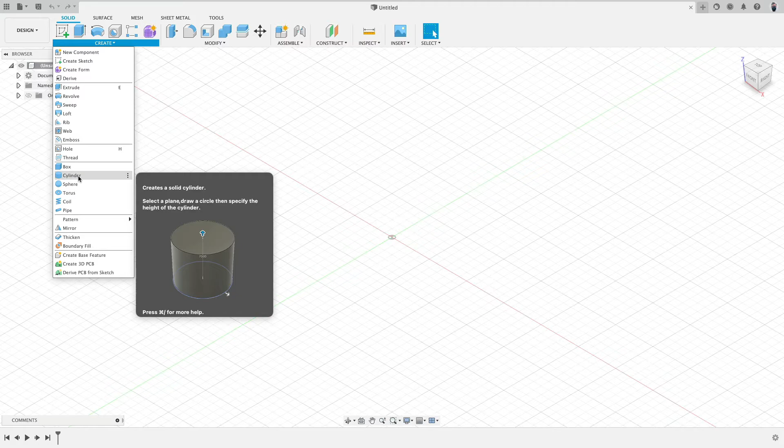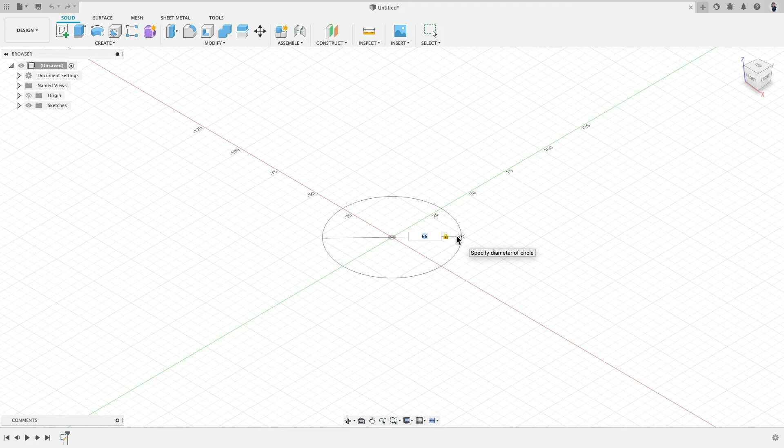So to start, we go to create and go to cylinder. When we create a cylinder, we can specify the plane. We want this to go vertically up. So I select the ground plane, click, and then go to the center point, click. And what I'm dragging out is actually the diameter. This should be 66, so I can type this in. So this is the diameter. Or if we know just the radius, which is half of it, 33 multiplied by 2. Pretty cool. The height is 160, and enter.

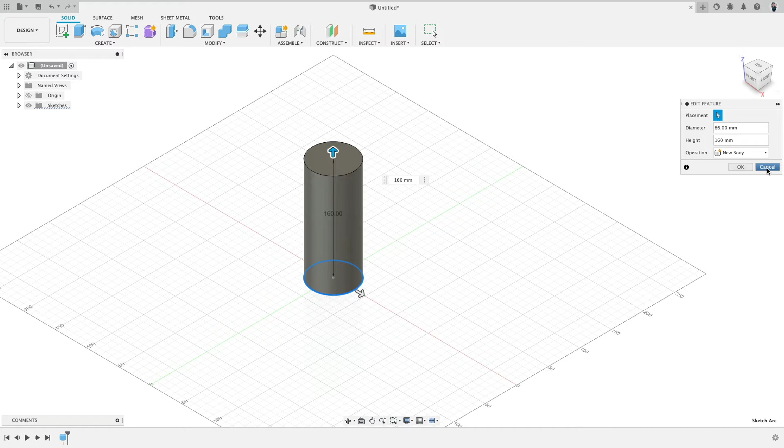And then you see the timeline captures the cylinder construction. The nice thing is we can double click and then later adjust everything, just by dragging or entering it. Cool, so this is the main bottle body.

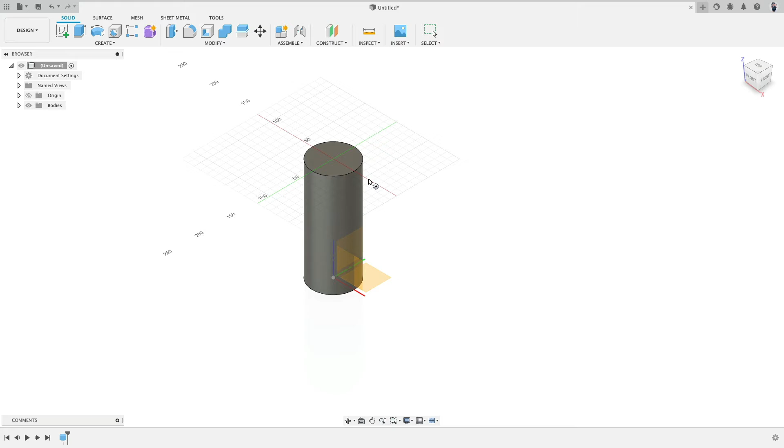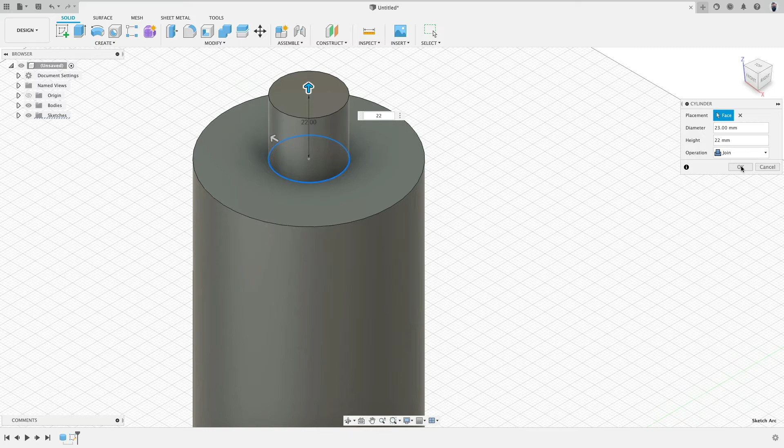And now we need to create a neck. So we go to cylinder. Putting it onto the ground or these vertical planes is kind of silly, and because we have a flat surface on top of the cylinder, you see we can sketch on it. So click, there's again the center. Drag this out. Here I know the radius only, 11.5 multiplied by 2. Very good, and then the height 22. And you see when we create a new cylinder or a solid and that touches another solid, the operation instantly thinks, okay, we want to join them. Okay, there we are, now we have only one object. Pretty cool.

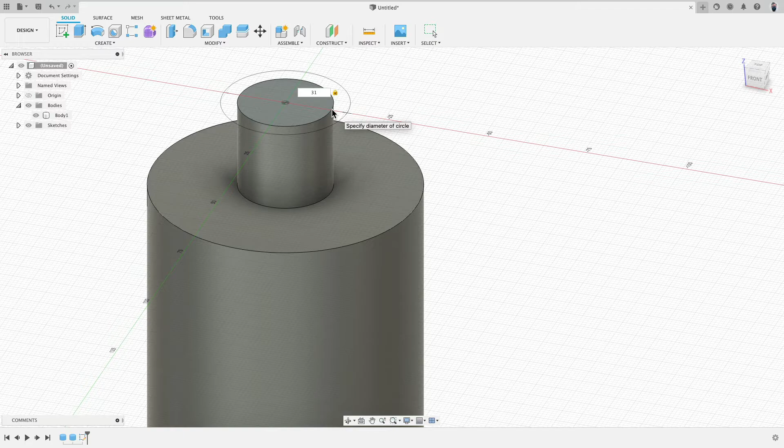When this is a bottle, we will have here a little ring going around. Okay, so how do we do this? Easy, cylinder on top, click from here. Now this is the diameter 23, and then I would like this to be 4 millimeters further away. So this is actually the diameter plus 8 millimeters on the left side and the right side. No, radius, so 8, that means this is 31 millimeters. Enter, and then this goes down actually.

Let's say 2 millimeters, and you see how this cuts because it is intersecting. And the software thinks we want to cut, but we don't want that at all. We want to make a new body. We make a new body. You see we have an object.

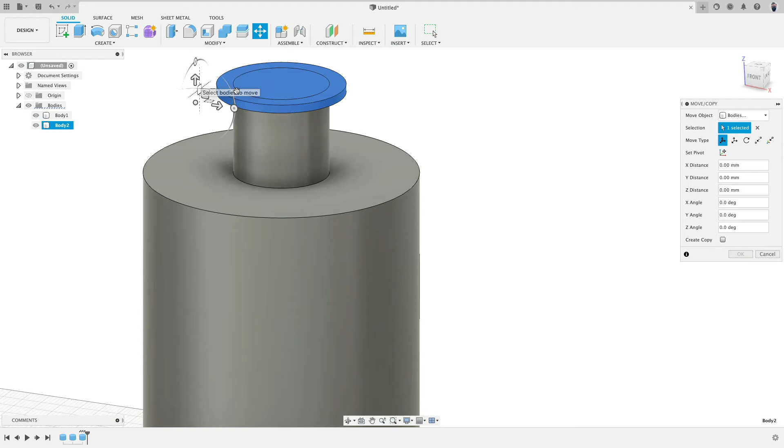And the reason why we did this is now we can go to move copy. We don't have to change the position of the widget. We can, if we want to be super precise, bring it to there. Click OK again. And then this goes down by minus 15 millimeters. Oh, I have to be careful. There. Minus.

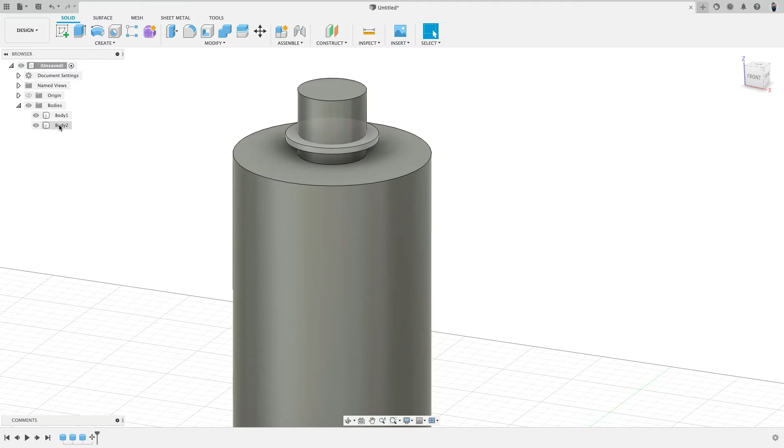Okay, very nice, here now we have two objects, the lip and this part. And we would like those to be fused together. Here is the tool for that, they call it combine. It's more actually a Boolean volume operation. That basically means we can add, subtract, find the difference. So here we have our target, our tool, cut or join or intersect. Obviously, we want join. Very good, now we have one.

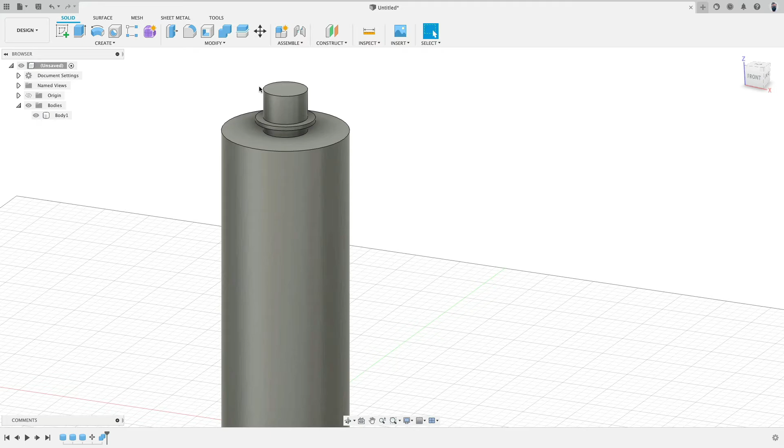Very nice, since we're working here on top, we would like to create also a cap that goes over it. Okay, that's easy, so cylinder there and click. So let's say material thickness 2 millimeters, so we need to add 4. So 27 it might be.

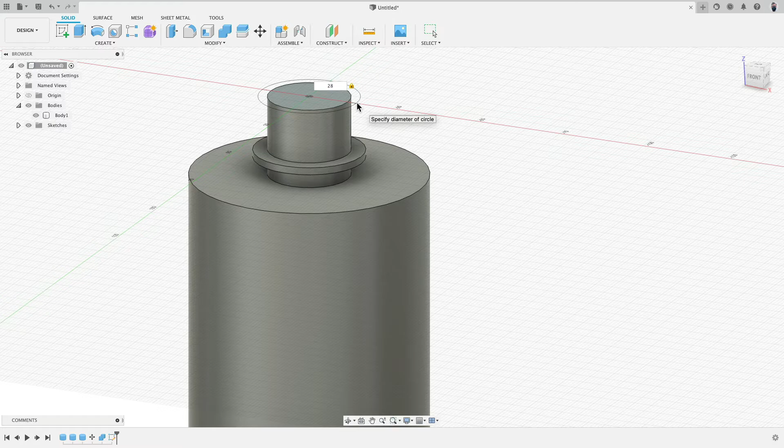Actually, let's say 28, that's good. So how far does this go down? We brought this one down 15 millimeters. Let's say minus 14, so we have a small gap. Also here, new body, okay.

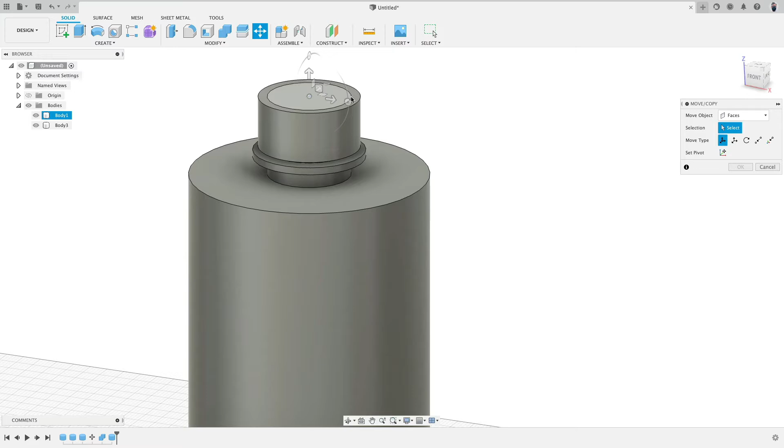Now you see that the top in here, this all sits together. That's not good, so this needs to be a little bit higher. We go to faces. Now be careful that we don't select the bottle face, but just the cap face there. And then this face we can move up, let's say 2 millimeters. Very good.

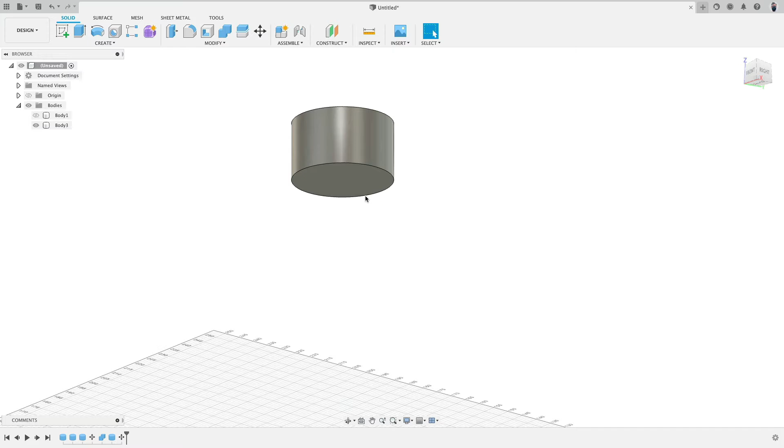Not too bad. Now, this, however, is just a solid cylinder. We need to core the stuff out. We could actually create a new cylinder here on the inside and drag it in to cut it out, but that's way too complicated. We have this body, the bottle, we can use to cut it out. So we go to combine. You are my target, my tool is this one.

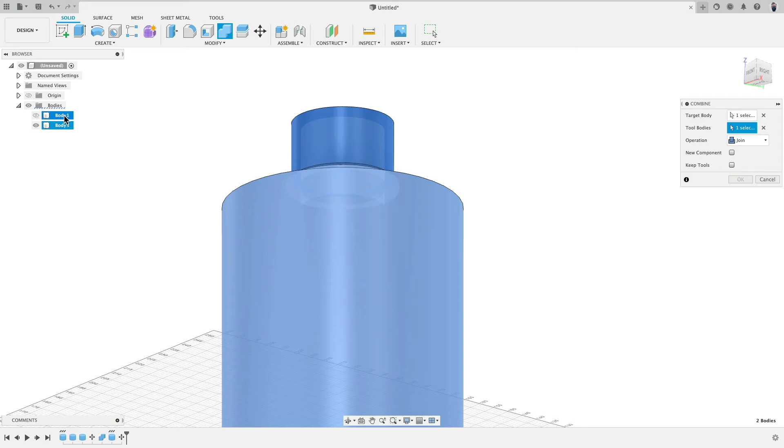Cut. Very good. And we want keep tools on, because now when I click OK, the tool remains there. And you see how this actually got cut out. Pretty cool, no? Yeah, I think so too.

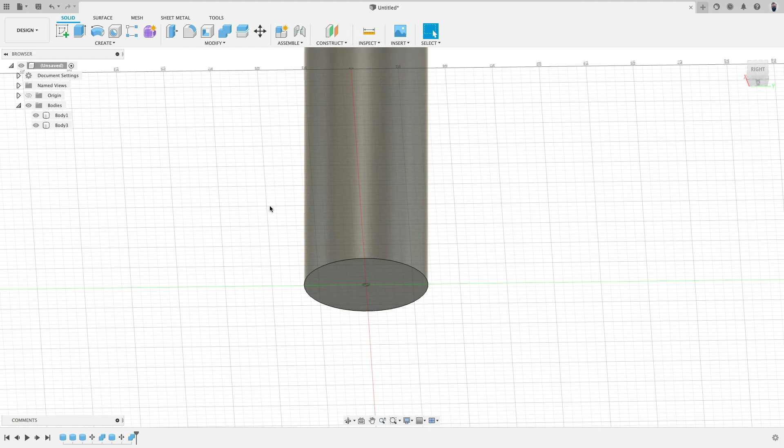Let's bring this quickly to an end. The bottom part we would like to be domed. Okay, well, we have a sphere for that. Click. I don't know really how big this is, maybe 80 millimeters. New body.

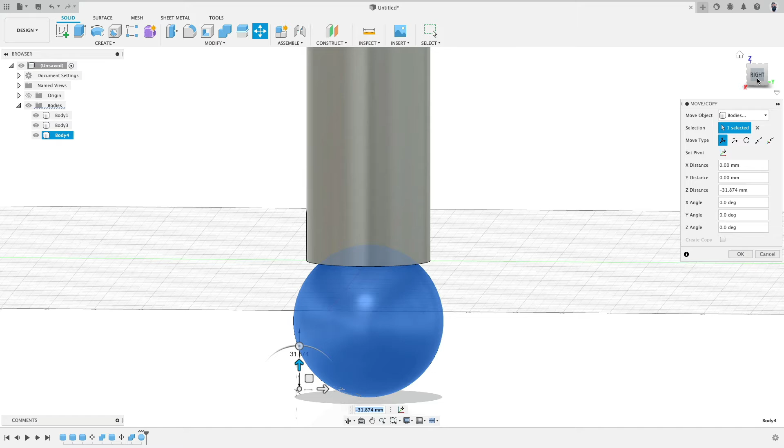And now this sphere, we simply move down till we can see, does it intersect well? I don't know, the sphere may be too small. We can adjust the size. Then I might have to double click to adjust the position. You see I just double clicked on this move command, I'm not adding a new move command.

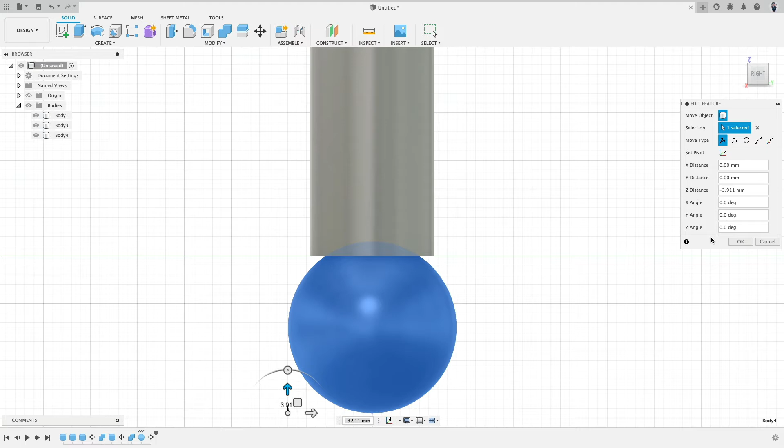Okay, let's go combine. So this time, do not keep tools. I want to get rid of that sphere. There. Yeah.

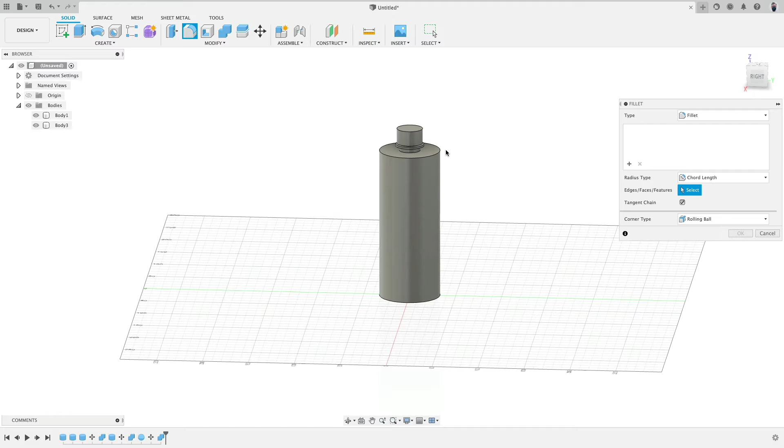Not too bad, maybe a little bit of cleanup. Fillet. We can click this edge and then drag this one. Constant here in this case is fine. We go with 16, that is good.

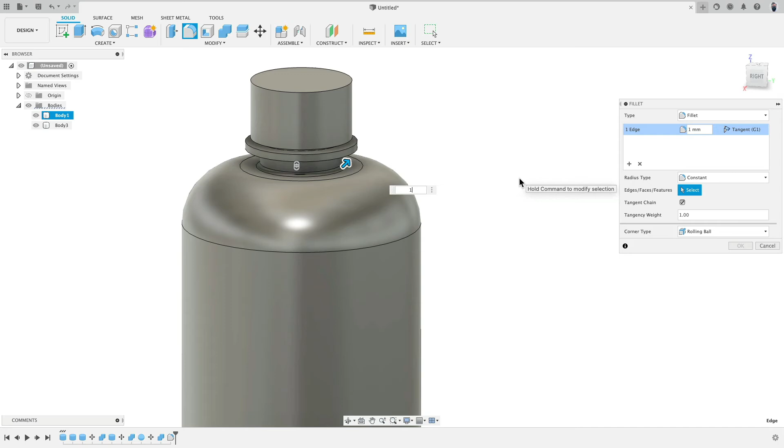Then, since I'm working actually on the bottle, maybe 1 millimeter there. And here, 6 millimeters, maybe 5. Okay, right click, repeat fillet, or you just go to fillet again.

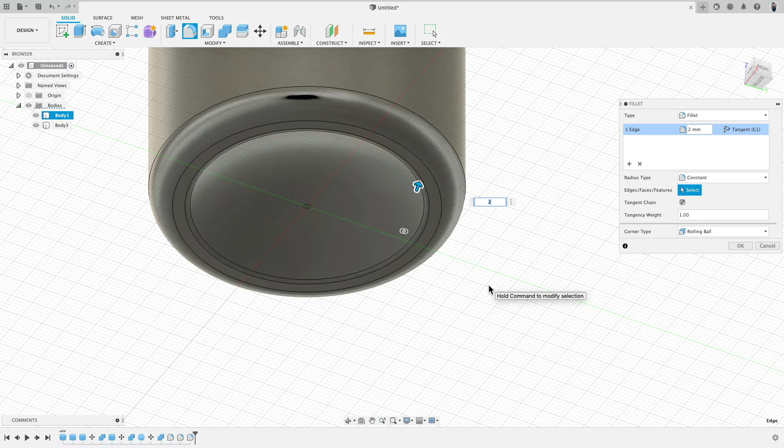2 millimeters. So in this case, 2 is too small. 4 looks actually good. Okay.

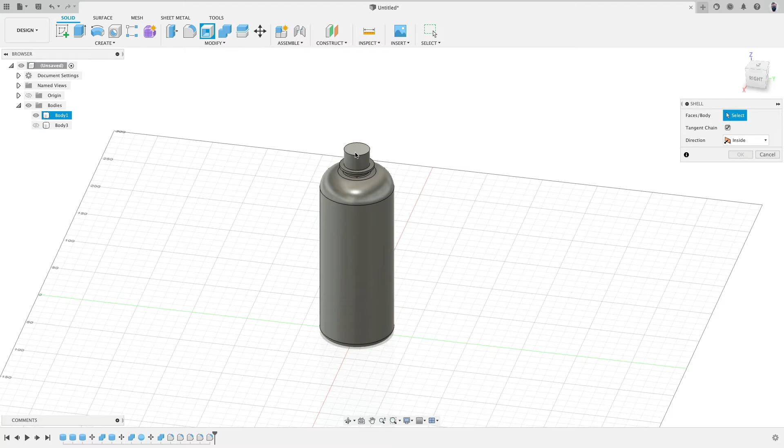And then the last fillet, maybe here, 1, a small one. Yeah, that looks good. So at that point now, the last step is, if we want, we could also core this one out.

So we made a very quick, solid model of a water bottle without any sketches, using literally only cylinders and spheres, and then more of the modeling commands: shell, combine, and also move to position everything.

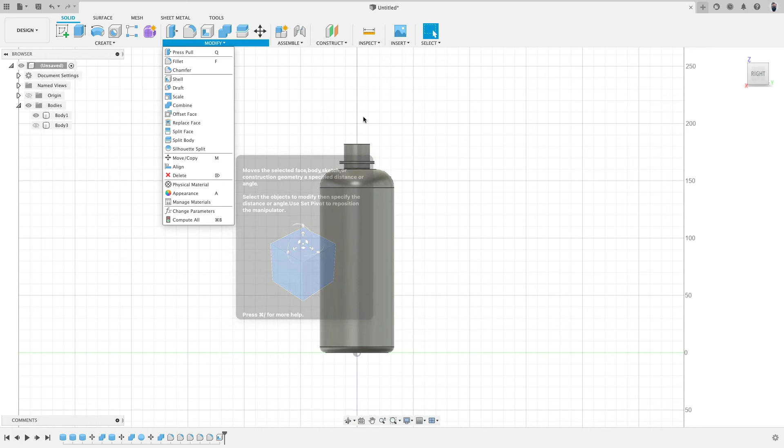Let's take a look into the inside. Now, even there, everything is nice and beautiful. So this is a very fast method to build something. We can literally adjust everything later. That's the nice part of Fusion and parametric modeling.

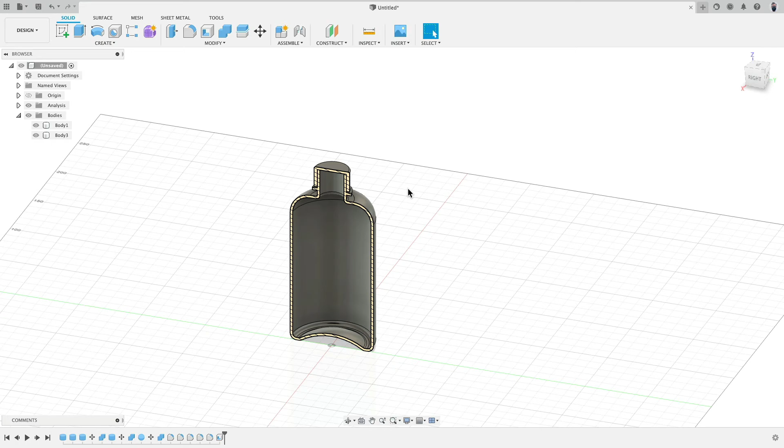Maybe the bottle is too high. Okay, let's make this 120. There, awesome, everything adjusted. Let's maybe go to 160 back.

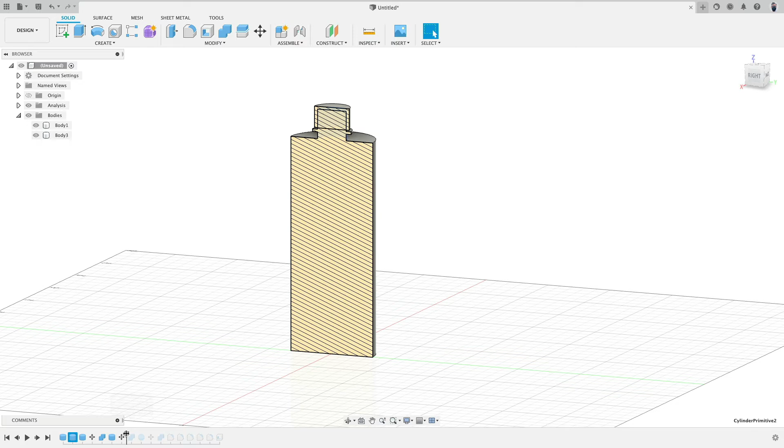So how does this actually work? This is the timeline: when I change the first cylinder, the software continues doing all these commands. And because I created all these new cylinders on existing geometry, it got referenced. And that's it, that's the whole beauty behind it.

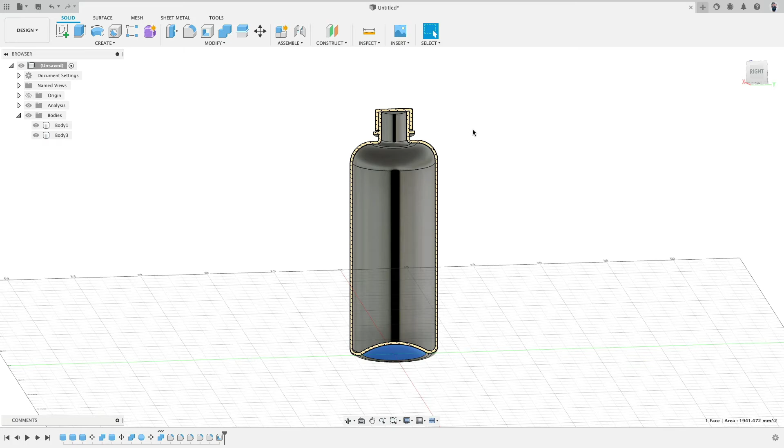The downside of this type of modeling without sketches is, well, I only can make this dome with a sphere. If this should be maybe an elliptical shape or anything else, I can't do this. Also here, this face which I selected, instead of horizontally, maybe I would like this to be more at an angle, and it's not possible with what I have here.

I could, technically speaking, go ahead and use chamfer on this edge, and then say 2 distances, so this goes really far in. This may be less, but then I'm making this shorter already, and I have to readjust the first cylinder I created for modeling this.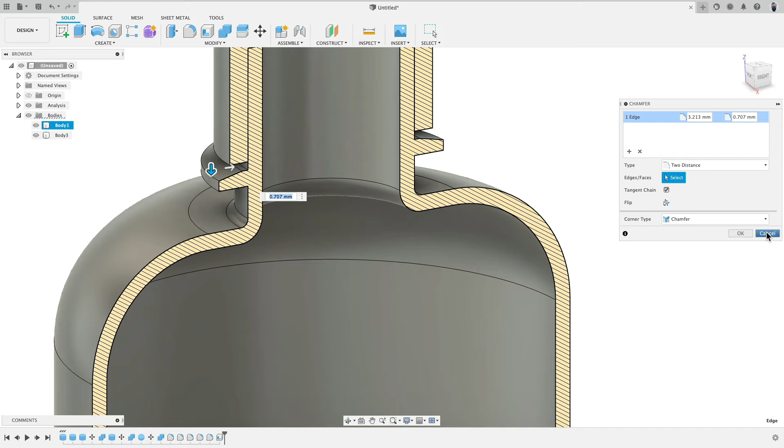So this is, technically speaking, possible, but not that super easy. So maybe I just add this at the end and leave it there.

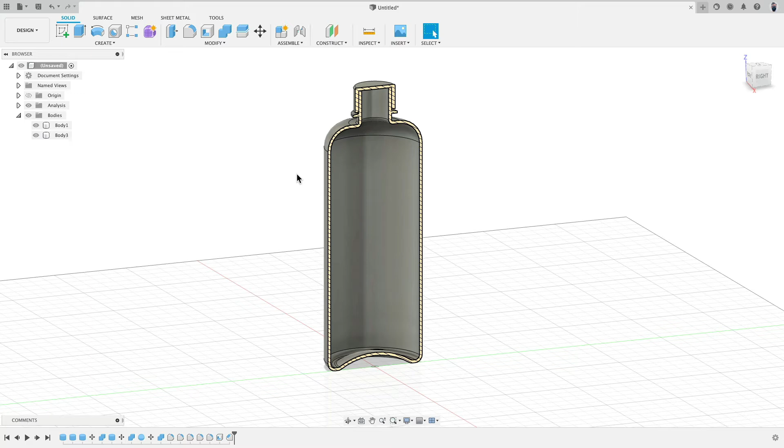Okay, so again, this is just only a concept model. It is fast, it is not as detailed, and that's good because of the speed, how I can explore an idea. Now in the next video, I will show you how we take this idea and build everything with sketches. And then I will show you that it is actually not as fast, but I can get more details modeled the way how I want.

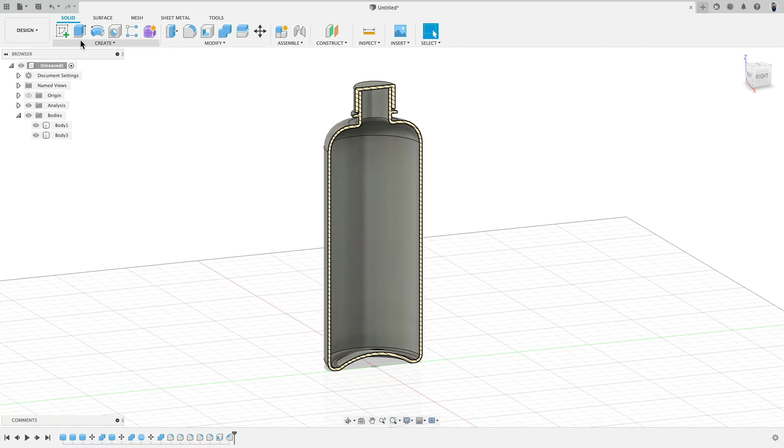So each method has really their advantage and disadvantage inside a design process. If I explore an idea very quickly to make variations, I might go with this simply because it's faster. And then when I know what I want, I go and rebuild the design with a cleaner, more detailed process.

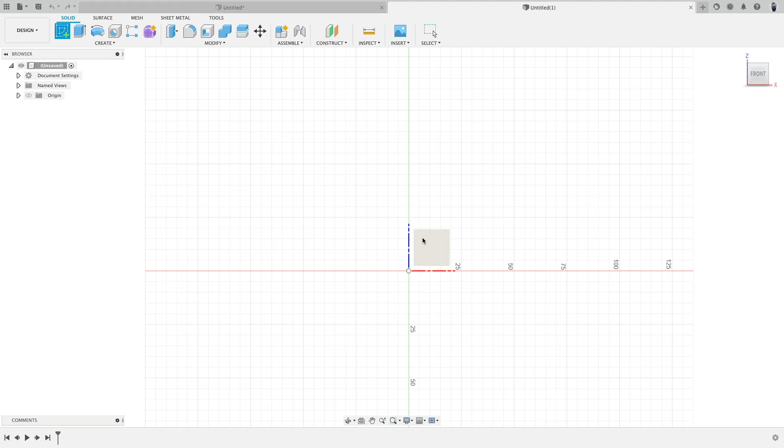To make the new version, let's create a new design. We will save each one later separately. Front view, sketch here, very good. And then I can actually block everything out very easily just with 2 rectangles. Let's see, probably not. You see there are actually two lines.

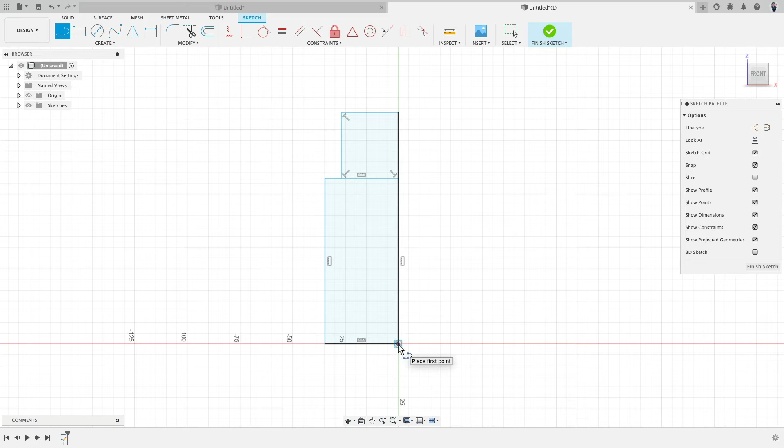So undo, and let's just click up, click to the right, till it's on the green, click down there. And because I drew the rectangle from the center point, all this has the vertical horizontal constraint.

Very good. Escape. Now let's add dimensions. So we know this should be 22. And then this is just a radius, so 11.5. Then this radius 33, and this height 160.

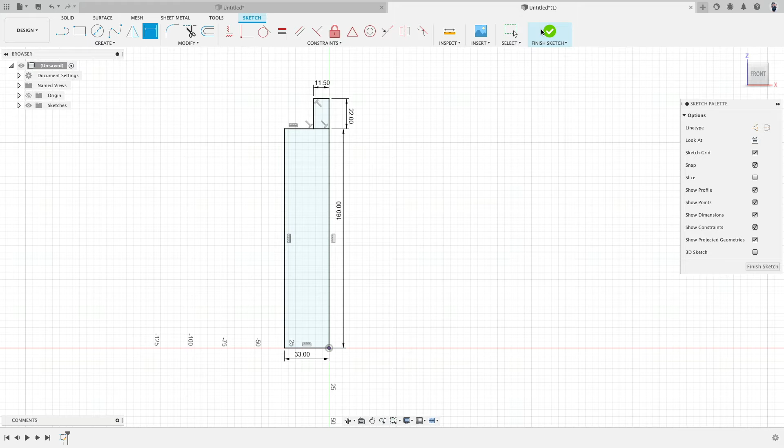Very good. So finish. And now let me quickly do a revolve study to see how this looks. Okay, that's actually fine. Now I would like, how do we do this?

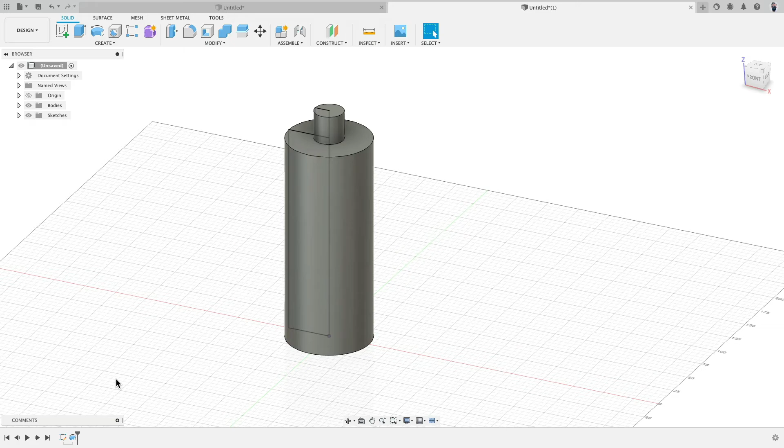Let's actually work from the bottom up. That's also very good practice. When you design something, don't necessarily jump to different areas. Try to work methodically, work cleanly. I can't say that word. Methodisch, in German I can say that. Work methodisch. Let's make this course bilingual.

So we make a line, and I jumped one step forward. I just double click now to go into edit mode. We make a line. Click, go to the right, escape, click this line, and say that's a construction line. Cool. And then we can go to 3-point arc from this endpoint to somewhere here, not the midpoint.

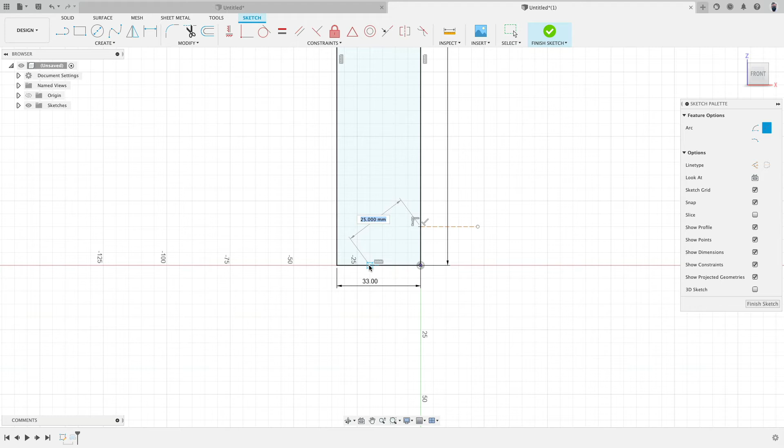Click, and you see when I move this arc, there's actually a tangency constraint popping up. See, it got automatically added. If you don't see it, let me redo the arc.

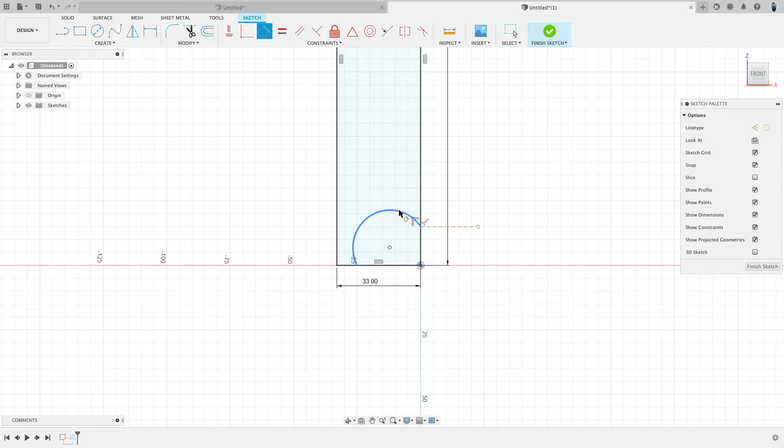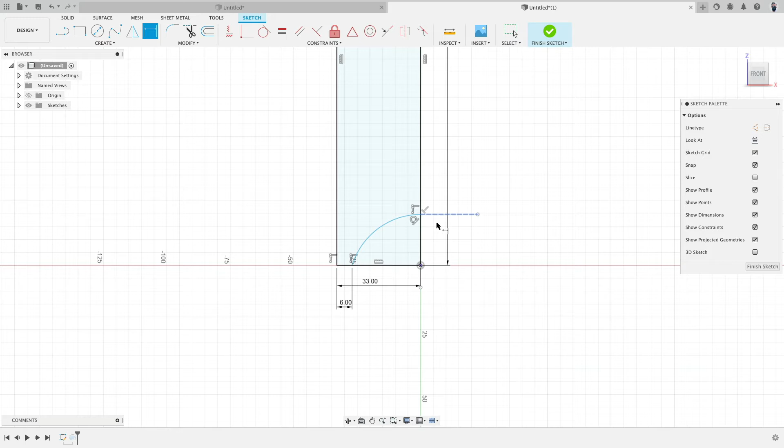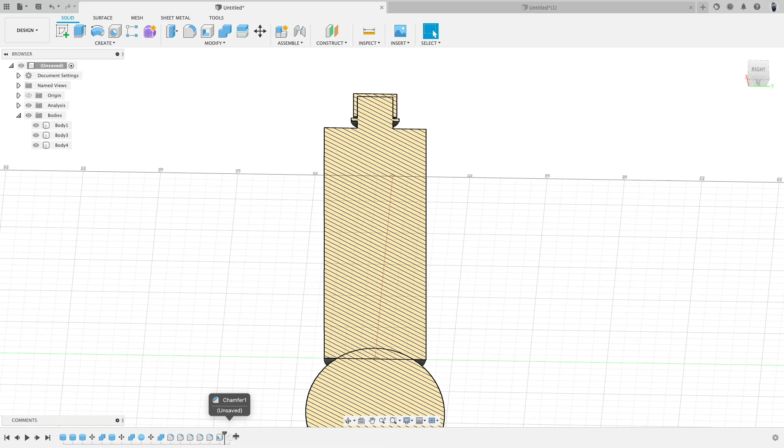6 millimeter, so we can specify this more. And then here to here, this should be 5 millimeters. And that already shows you how much more control I have compared to eyeballing the position of the sphere, moving it down and judging by gut feeling. But nothing is wrong with that way either, because it's actually very fast. This way is just more precise but also slower. Okay, so that is done.

We would like to have a small lip up here. We will do this with the line. I'm simply blocking things out very loosely. Again, try not to snap this onto the midline. Let's see how I did this here, because then we can't move this up. We can, however, select the midpoint constraint, delete it, and then we can drag it.

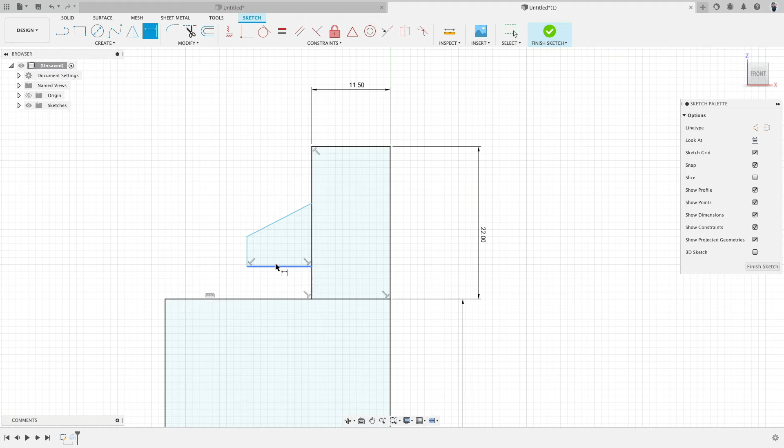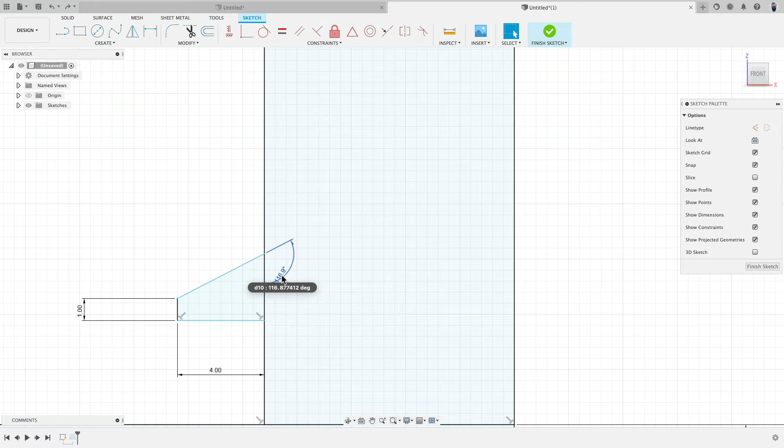We need to specify dimensions. Sketch dimension, 4, 1, and then the angle here, click this line, that should be 82. No, that's not correct. So 90 -- oh I see, yeah okay. Let's go with 98. Yeah, because 90 would be perpendicular. So 82, I actually then had this at 98. It was an 8-degree difference. Okay.

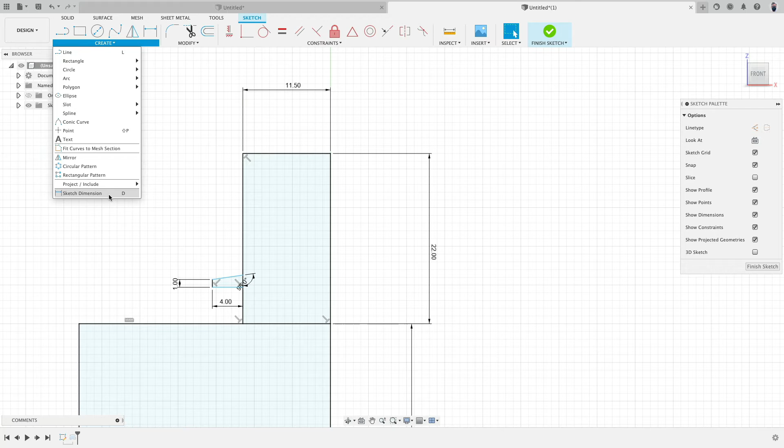Very good. Now the height position, we set this point to there. That is 15 millimeter. So at this point we have the details in.

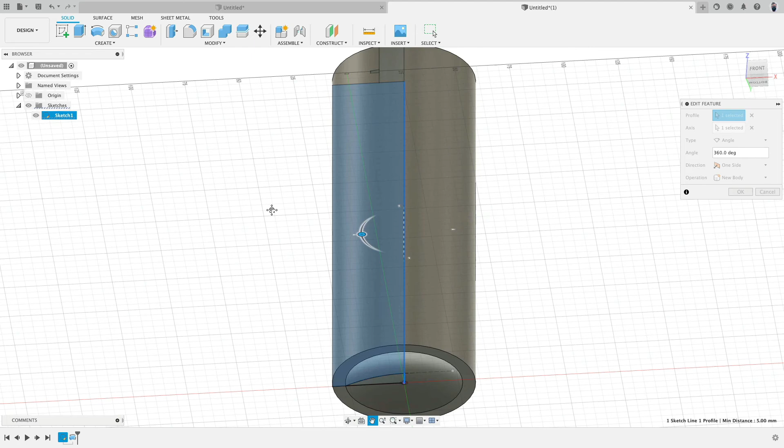So now we can double click on the revolve command. And I will simply turn -- no wait, I will turn this one off. So click this filling, you see that? Then we can hold control on PC, or the Apple key on Mac OS. Click this one, do this one more time, hold control or the Apple key, click this one. So we add those to the revolve.

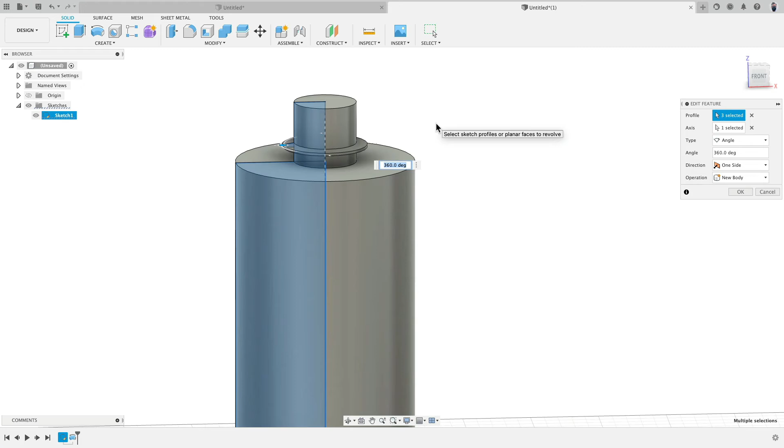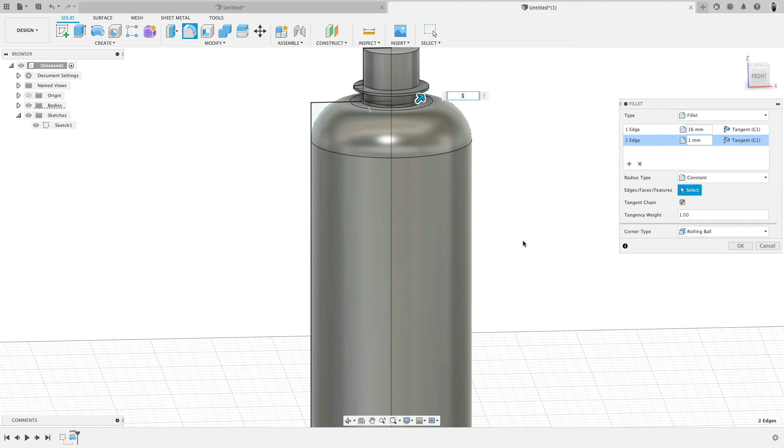Okay, cool. So we add fillets. These fillets we can actually add now. Very good, so 16, very nice. Now I will actually do all this in one fillet command. See how I click add there, and add. This one was 2, actually 4, remember, plus here, this one will be 6.

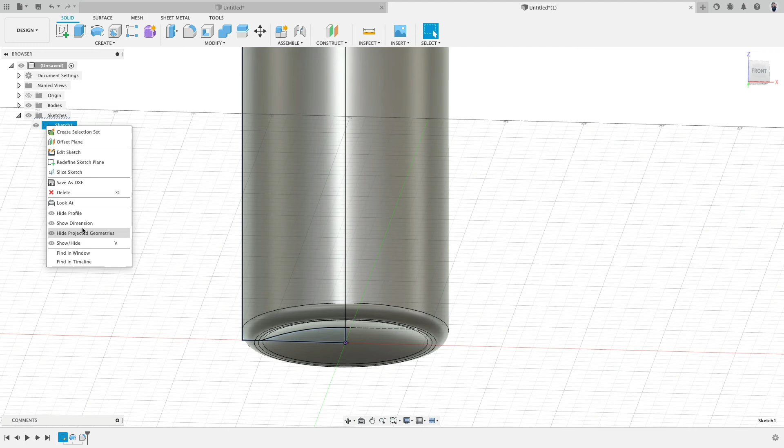That's too big. 5, 4, okay, so this one actually -- so if I want this to be 6, then this arc needs to be smaller. Okay, so right click here and say, if it doesn't do it, maybe click again with left mouse button, there, right click, show dimension.

Make this 8, or 7, maybe 7 is enough. Double click. So where is this value here? This is the 1 and 5. Okay, 6, that works, very good.

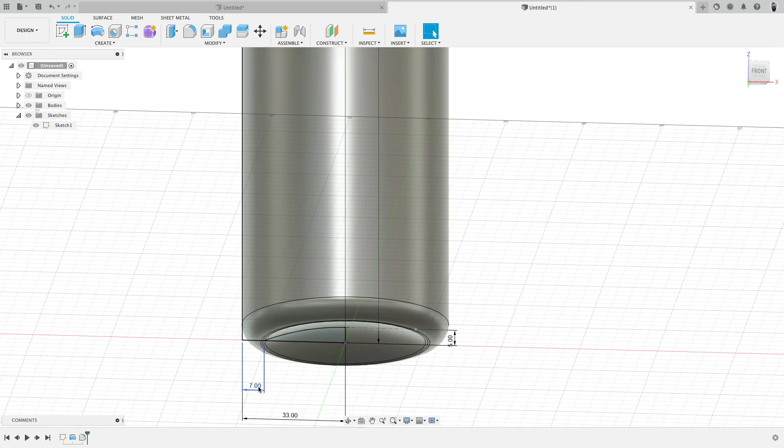Then maybe here, this edge, we make 2, so we make it smaller. Okay, or we can also make this distance bigger, that pushes this arc further back. So you see how I can fine tune this more.

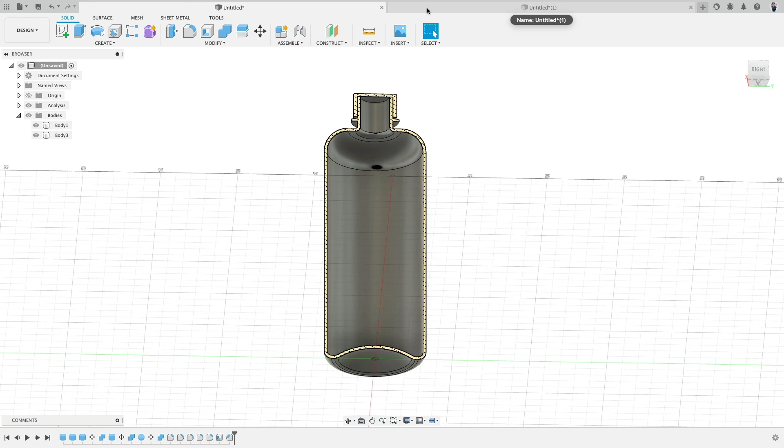And what I'm doing right now is actually why some people say CAD is slow, because you get lost in funny details. Which is why, even when this is not very precise, when I'm just exploring an idea, this is totally fine and faster. That's also why I think about this as sketching just in 3D, not just pen and paper. Okay, all this is pretty much done. That is nice. And now we can go ahead and do a shell on top, 2 millimeters.

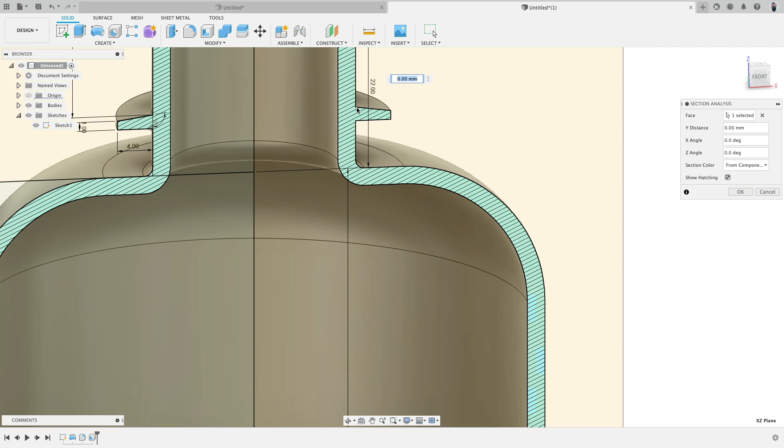I was actually concerned that this might cut in, but the wall thickness is thicker than this, so it will not create a cavity.

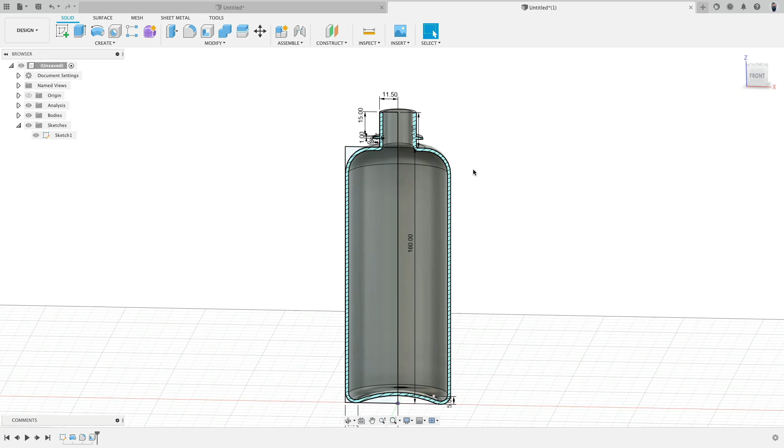Beautiful. Okay, well, a few more fine-tuning steps - that's the cool part of this type of modeling. I would say the main body for the bottle is done, and now we can create the cap.

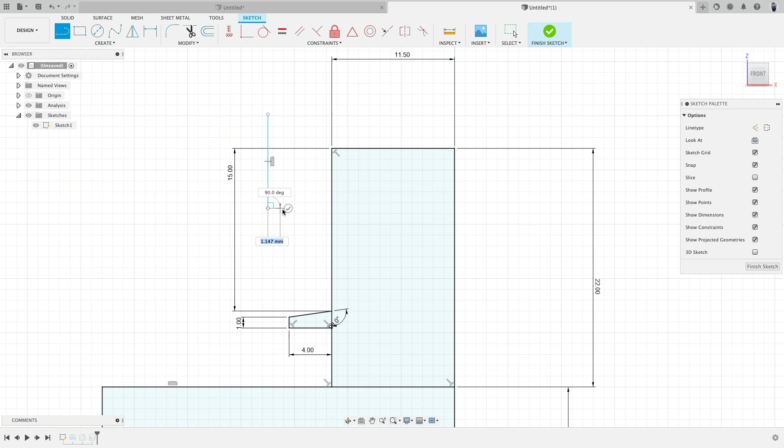Now I have two options: I can create a new sketch, or I can add it to the existing sketch. This is a very simple object, so I will add it to the existing sketch because then I can nicely sketch over it. So I will do something very simple on purpose.

A little bit tricky, so we get some practice on how the constraints work. Everything is vertically and horizontally constrained. This line I would make tangent here, so we can make this point and this point constrained, but it's going to make this horizontal.

So undo - that means escape. We have to bring this closer over, so it is vertical there. Now this line is perpendicular to this line. Then we now make this and this equal.

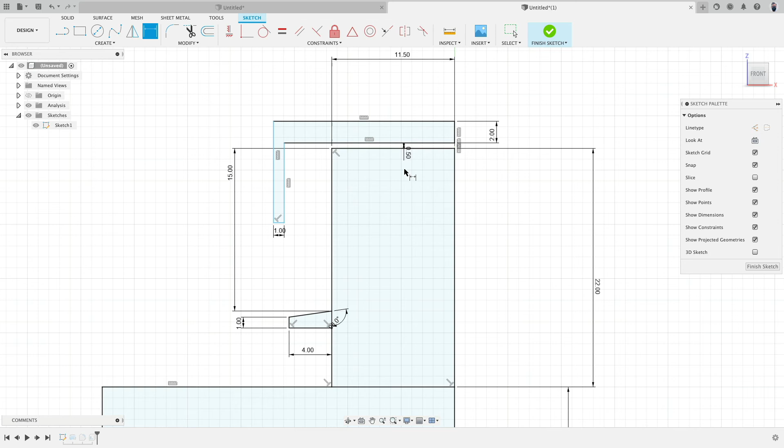So this one will be 1 millimeter. This we make 2 millimeters, so it just has more material. And then we can specify the distance, 0.5, just so we can see this - normally it would be 0.

And now here we can say, we later put a threading in. The threading is maybe 2 millimeters. Very good, we can specify...

A length here, because as you can see the sketch is already black, but we can create what's called a readout. So this line is 14.5, and you see how this is actually sticking out wider than this one.

So if we want this face to match this line, just so you understand what we have to do - this we need to remove, and then we could say, use a vertical constraint. So you see now how this did a readout. What's actually the distance? Let's see, I'm curious - 2 millimeters, okay.

Yeah, okay cool, let's make this equal. Oh, this didn't work - why didn't it work? Oh yeah, we have this distance here too.

So this specifies 2 millimeters, and then this constraint specifies this to be here. So these two lines are specified, which generates just a line or length. By surprise, this is 2 millimeters.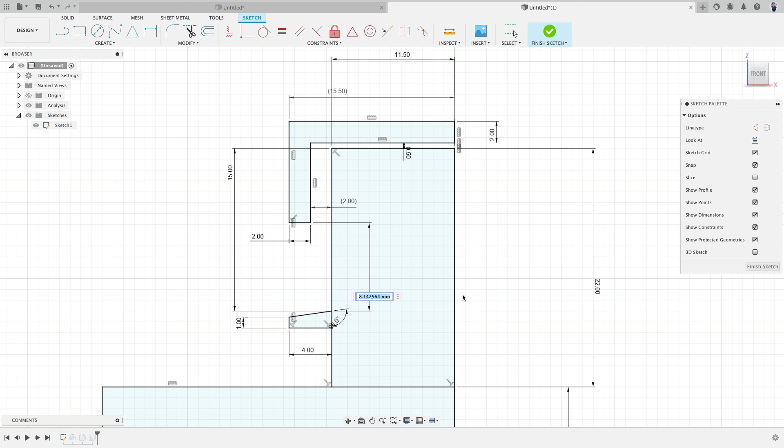Now this is still blue, so maybe from this point to this point, but not aligned, but vertically, I would like to have a small gap of 1 millimeter. So down here I have a fingernail, I can just push down and rotate the cap up.

Very good. Now what do we do now? So the cap is there. Can we actually put this in here too - actually it creates then two objects.

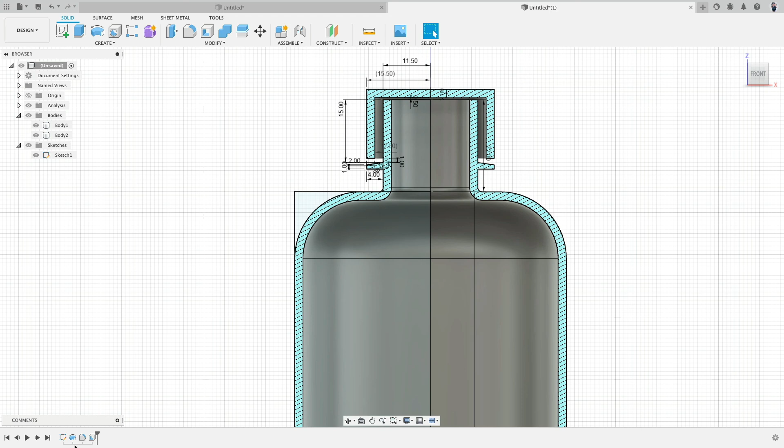So you see, if we want to, yeah - or if I undo, this is maybe more logical. Now we make a new revolve command. Very good, and then here, very tiny rounding on top. So we have object number 1 and object number 2.

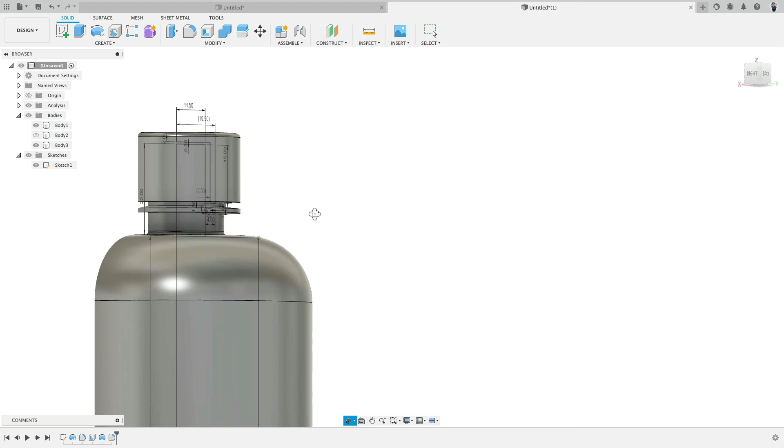Perfect. So now we created a water bottle starting as a solid modeling study. And then we created a revolve with more fine control through the sketches.